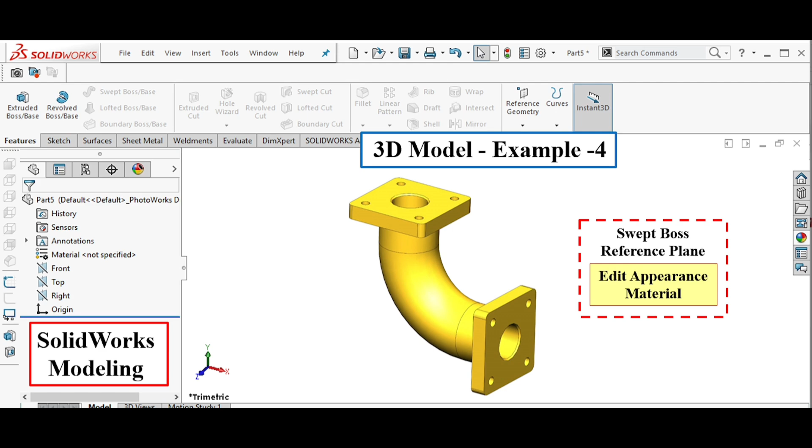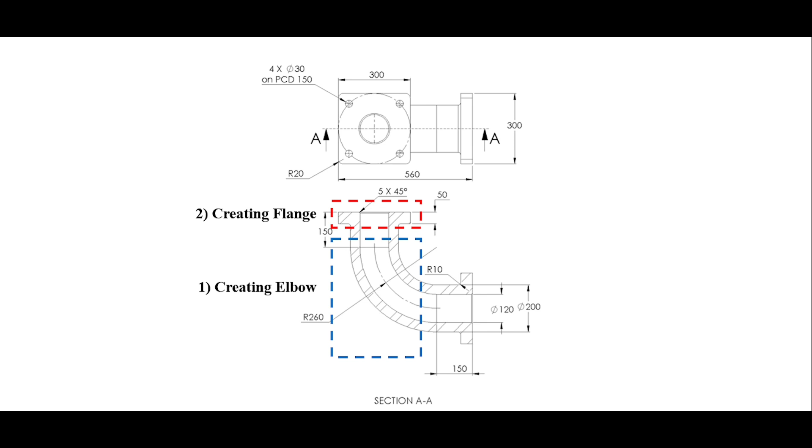So we have an orthographic projection with us. We have a top view and a sectional front view. Those who have already learned engineering drawing must know about the orthographic projection. From the two views we are going to make a 3D model. So first we are going to create an elbow, then we are going to create a square flange, and then the replica of the flange, that is a mirror of the flange.

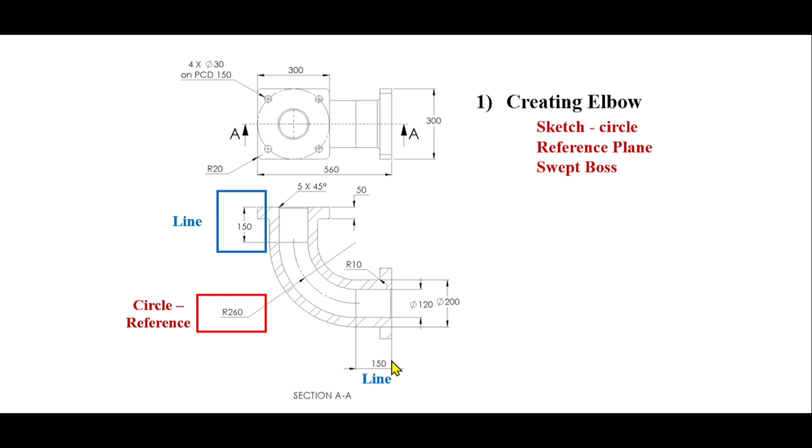So first we are going to create an elbow using a sketch, reference plane and swept boss options. So we have a reference radius of 260 mm, and then from this 90-degree angle we are going to make a line of 150 mm on both sides. Then we have circles for a pipe. So first of all I'm going to make a reference circle of radius 260 mm.

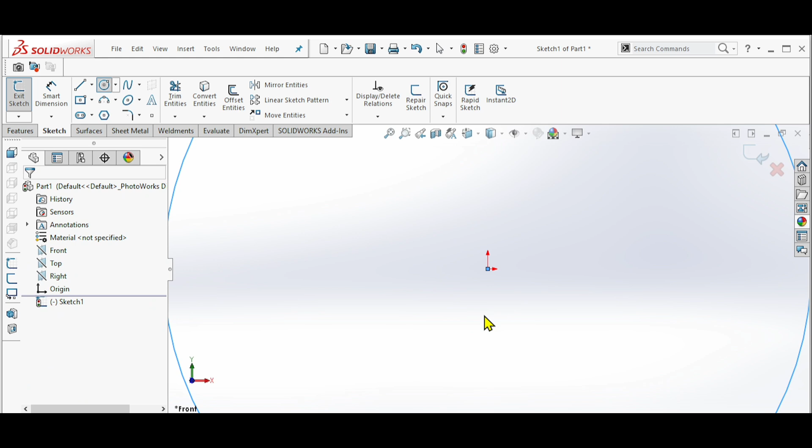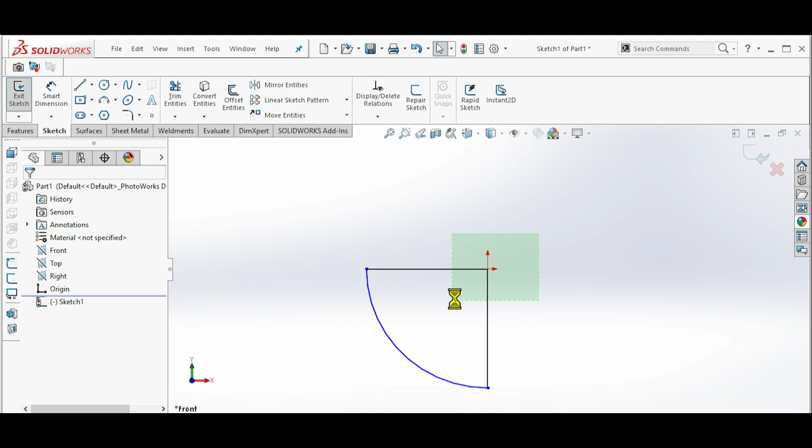So in SolidWorks I have selected the front plane. In sketch I'm going to create a circle of radius 260 mm. Okay, we just need a 1/4 portion of the circle. So I'll use trim entities. I'll just cut the remaining portion. I'll make both of the radii construction lines.

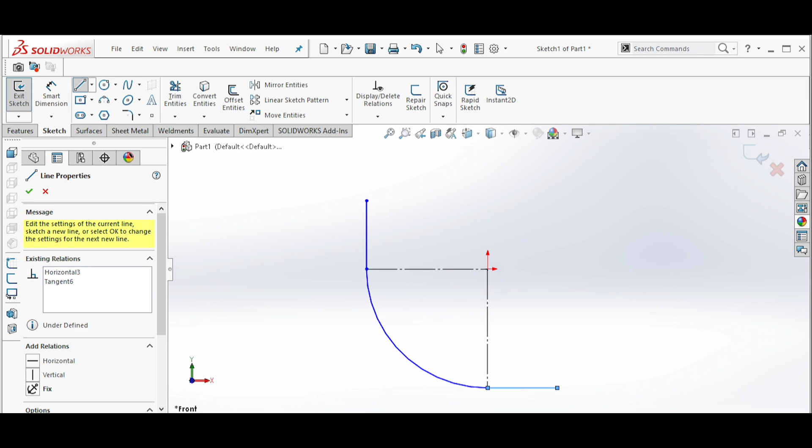As mentioned in the orthographic projection, we have two lines at the end of the quarter circle of 150 mm. So a vertical line of 150 mm and another horizontal line of 150 mm. Now we'll go back to the drawing. At the end of the 150 mm we are going to make two circles of 120 mm diameter and 200 diameter. For that we are going to create a reference plane.

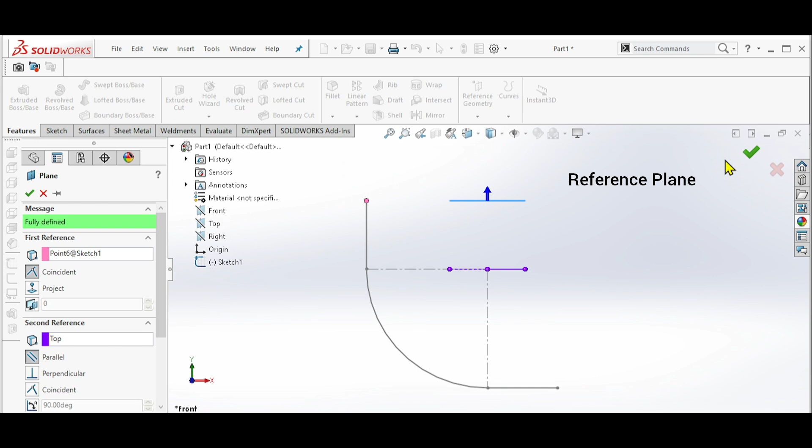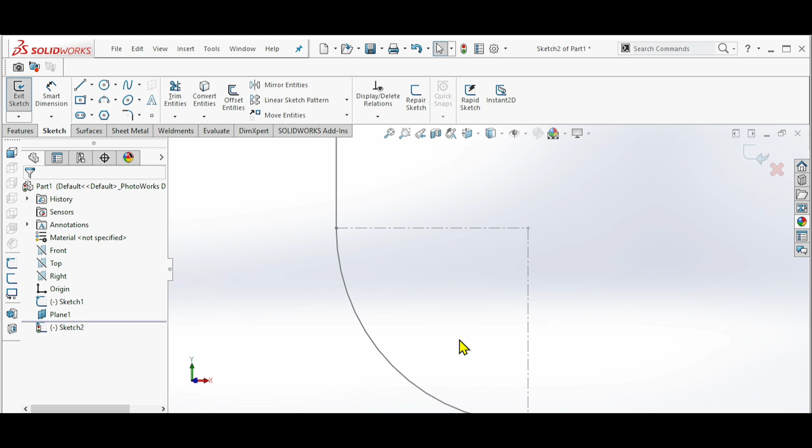So I'll exit the sketch. I'll go to features, reference geometry, reference plane. I'll select this point. As we need a plane which is parallel, I'll select the top plane, so it will be parallel to the top plane. I'll select this plane and click normal to. So now I'm going to create two circles on the reference plane of 120 mm diameter and 200 mm diameter. Okay, you can see both circles on the reference plane.

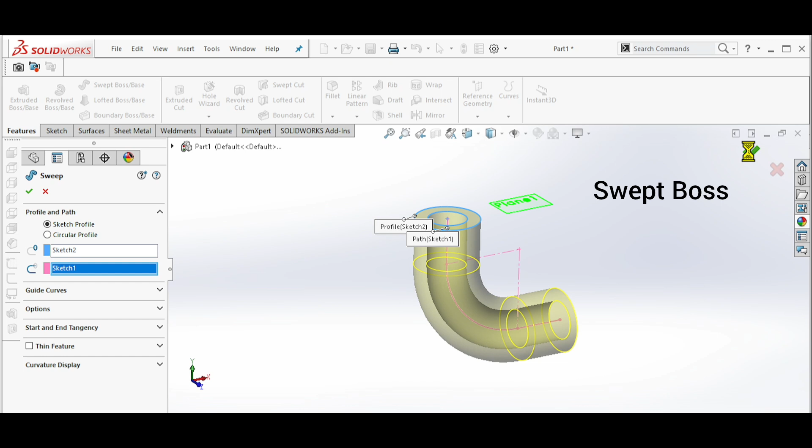For creating a pipe, I'll go to features. I'll use the sweep boss option. In the sweep boss option, as we know, we need to select one profile. Our profile will be the two circles and the path will be the elbow. So a pipe is ready. So we have created a pipe. We can take a sectional view. Here you can see, as shown in the section view, our pipe is ready. This much portion is ready.

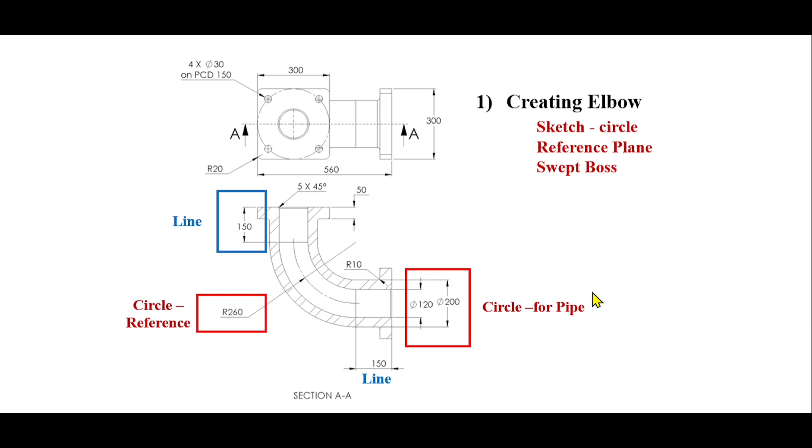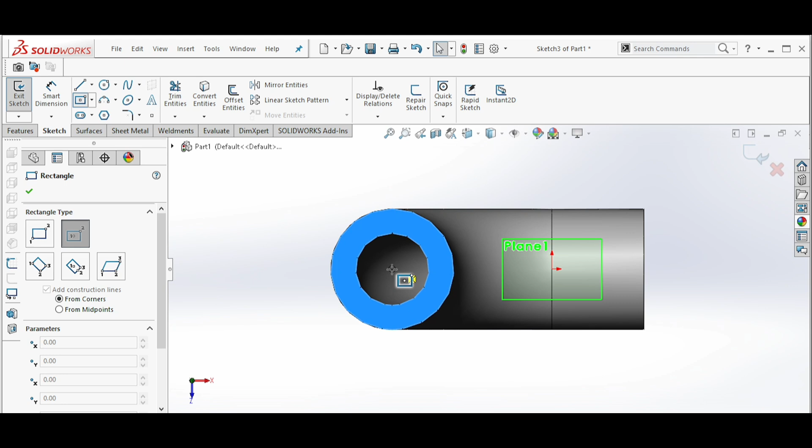So next we are going to create a flange. We need to create this square flange. For that I'm going to create a square, then I'll extrude it by 50 mm. So I'll just select this top plane of the pipe. I'll go to the sketch. I'll use the center rectangle from the center of the pipe, you can see here the black center, 300 by 300.

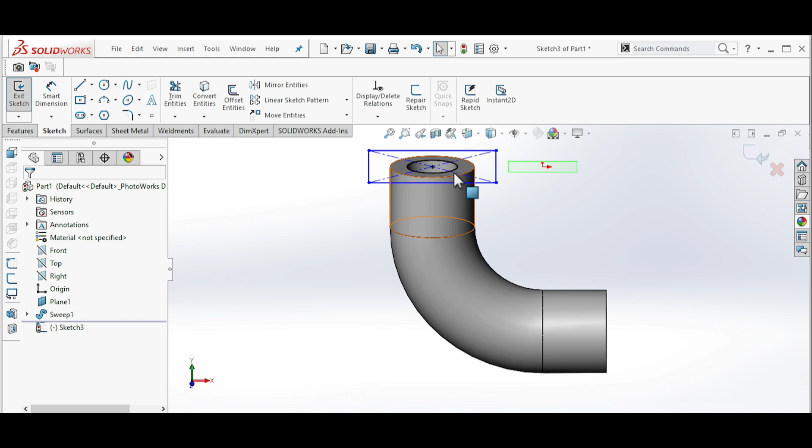Now we need to select this circle. Instead of drawing it as a sketch, I'll go to convert entities. Through convert entities, we automatically got the sketch. So our sketch is ready. Next I'm going to use the extrude boss option by 50 mm. Currently it is outside the pipe, we need it inside, so I'll just flip it. So my flange is ready, you can see.

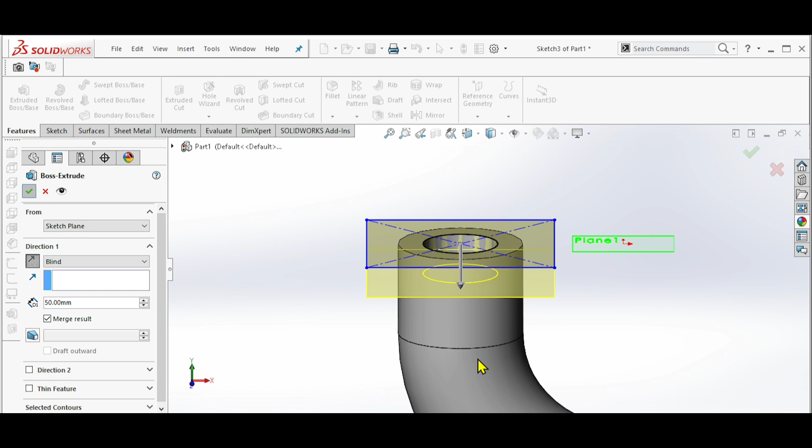Next we need to drill 4 holes of diameter 30 mm on a PCD of 150 mm. So here I am going to use a circular pattern. I'll select this face, normal to. I will create a circle of radius 150.

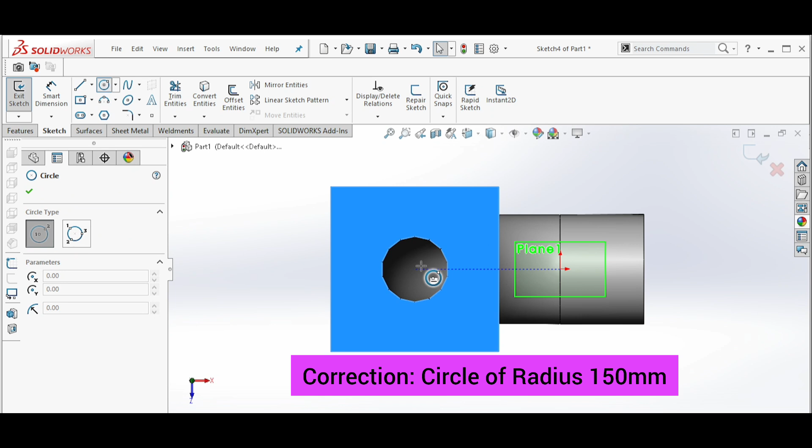I'll just draw one diagonal. I will select a circle. From the intersection of the diagonal and circle, I'll make a circle of diameter 30. Now I'll make this circle and the diagonal as construction.

Now I'm going to use the circular pattern option for making 4 equidistant holes. So here in sketch you can see linear sketch pattern. In the drop down you can see the circular sketch pattern. You need to select a circle or the center of the circle. So I have selected the center of the circle. Then here, entities to pattern, I will select the small circle.

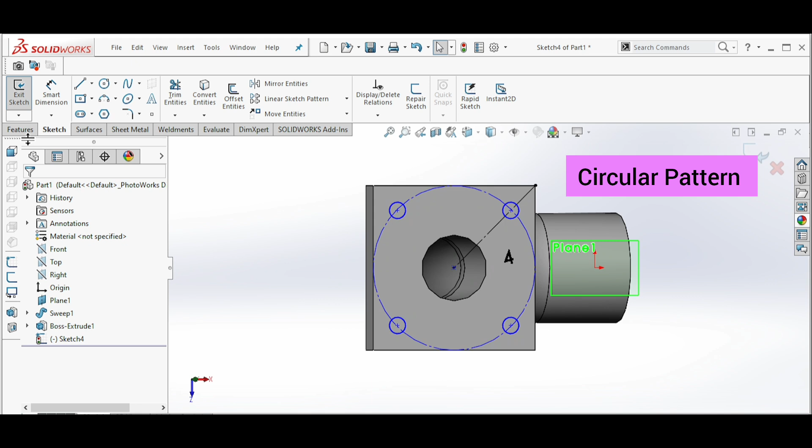Here you can put the number of patterns, 4, 5, 6. You can do whatever you want. So I will make it 4. Equidistance, that is equal spacing. So our 4 circles are ready. Now we need to drill it. So for this I am going to use features and then the extrude cut option. Now you can see our flange with the holes is ready.

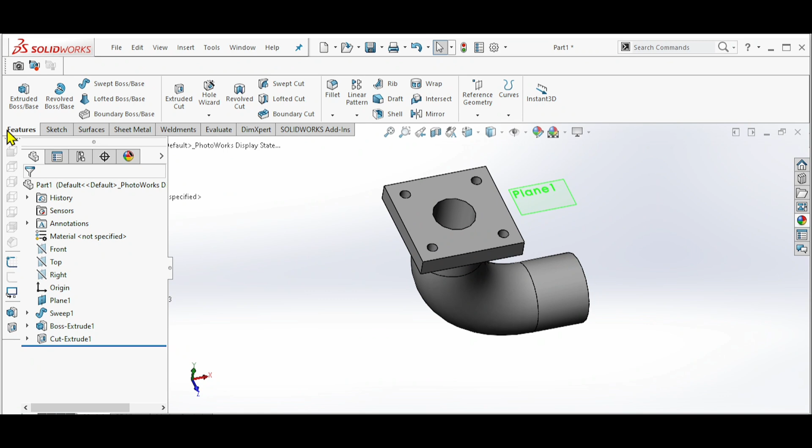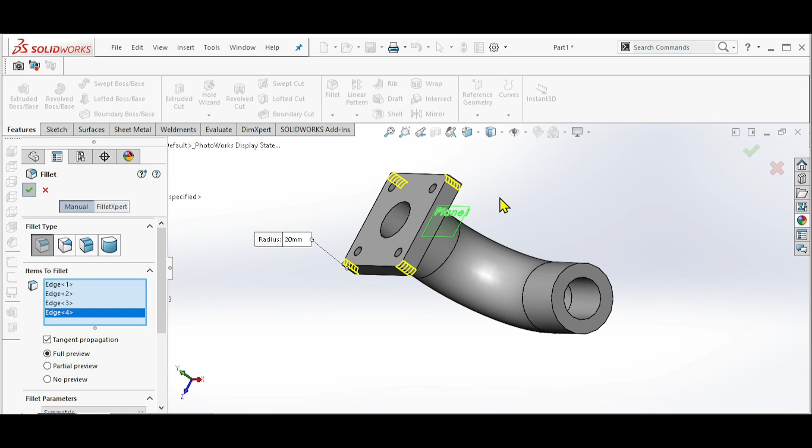Now next there is a fillet at all the corners of the rectangle or the flange of radius 20. So here again in features, fillet option. Here you can put the 20 radius. Select all 4 edges. So this is our elbow with one side flange ready.

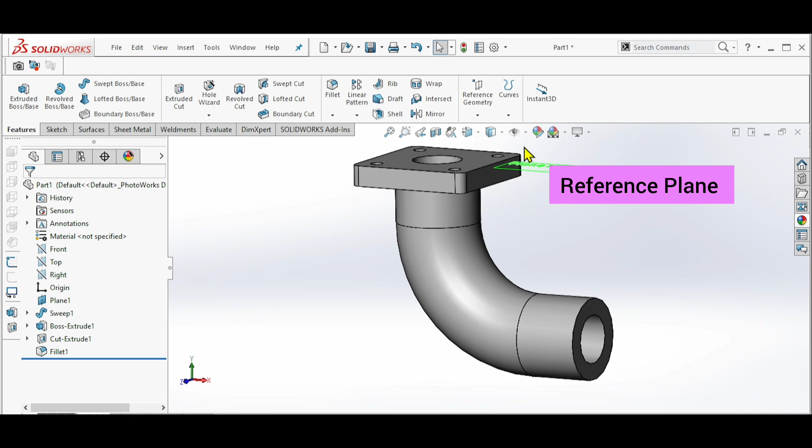So next we need to make another flange. For that I am going to mirror it. Before making mirror entities, I need to create a reference plane because it is not symmetric to any standard plane. So next again I will go to features, reference geometry, plane. I will select this face, both ends of the pipe. So our plane is ready.

Next I will go to the mirror. In features, I will use the mirror option for features. Then I will select this plane, full preview. I will select this flange, then the extrude cut option. Okay, but our fillets are remaining.

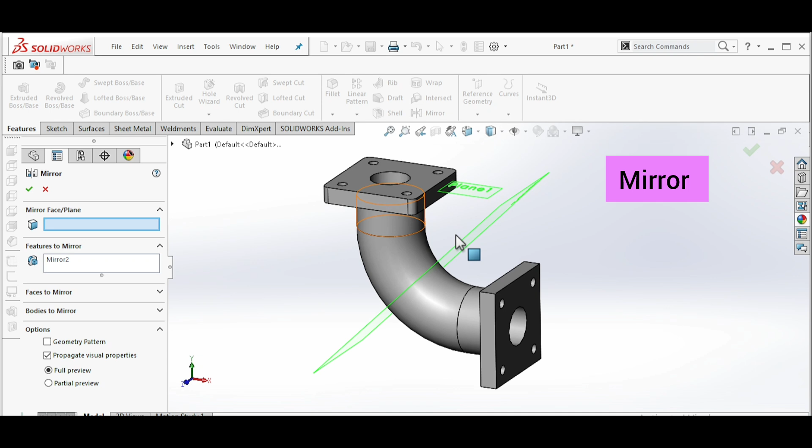So what I'll do, I'll again use the mirror option, because in one mirror all the features cannot be mirrored due to some constraint. So I will select this mirror. Now you can see all the fillets are mirrored. So our product is almost ready.

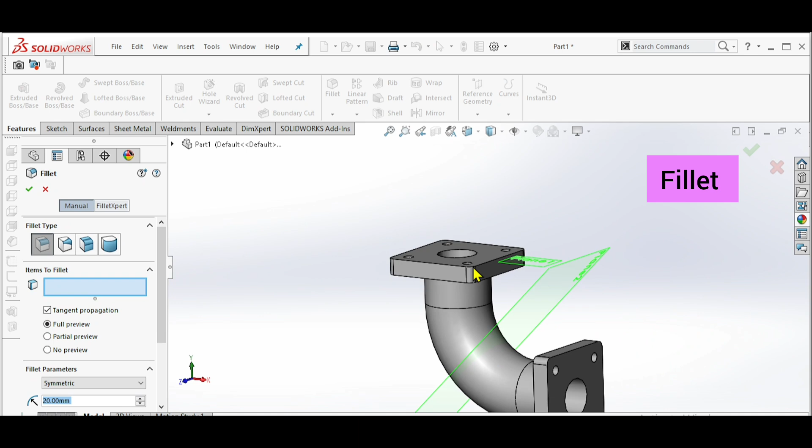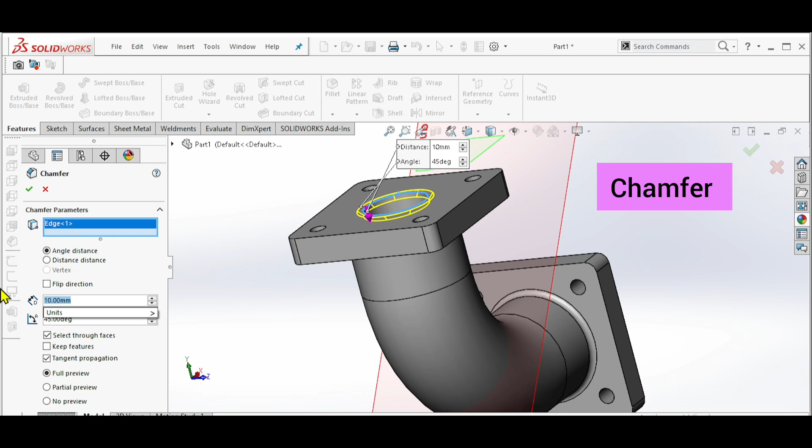Next you can see there is a fillet of radius 10 and a chamfer of 5 mm 45 degrees. So I'll go to the fillet, here and here, of radius 10. Here we are going to adjust the radius. So both the fillets are ready. Next we are going to create a chamfer. In the fillet drop down, chamfer, I will select this edge, 5 mm 45 degrees. So you can see our elbow is ready.

Next we are going to change the appearance of the elbow either by adding a color or by selecting the material. So here you can see material, right click it, edit material. Here you can see steel material. There are so many materials. I will go to the copper alloy. You can select anything, like I will select brass.

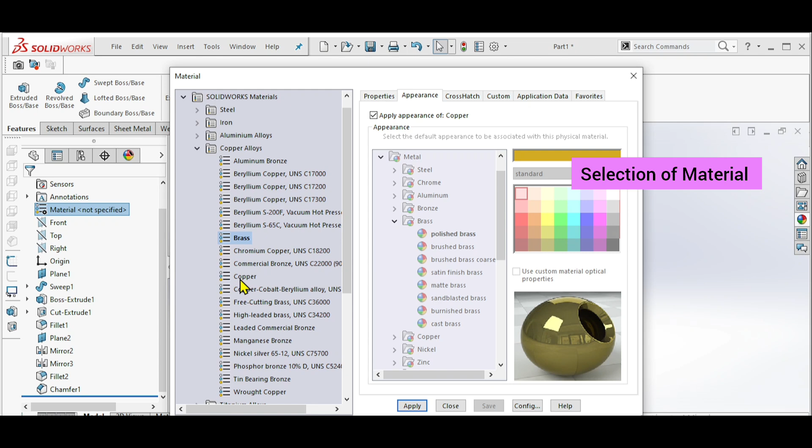So here you can see the appearance of brass. Here also copper. I will go with the brass. Apply and close. Now you can see your appearance is changed. I will just select the background as white. Now you can see the appearance by selecting the material. Another way of changing the appearance, go to edit appearance.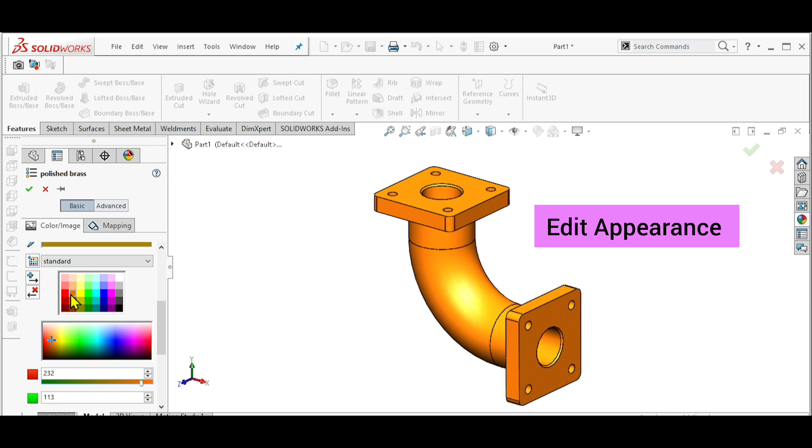Here also you can change the color. Look, you can change any color like green, sky blue, blue, red. Like that you can edit any color. So this is how we have created an elbow from the orthographic projection. So today we have learned reference plane and edit appearance, or giving a color to any component.